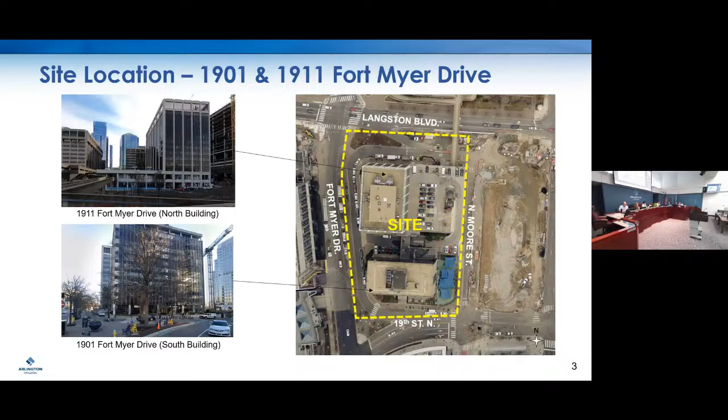This site is located at 1901 and 1911 Fort Myer Drive in Rosslyn. There are 2 existing office buildings on the site today, the north building and the south building, that were built in the 1960s and would be demolished with this redevelopment program.

In terms of the general land use plan, this site is designated as high office apartment hotel on the GLUP map, and it's within the Rosslyn Coordinated Redevelopment District.

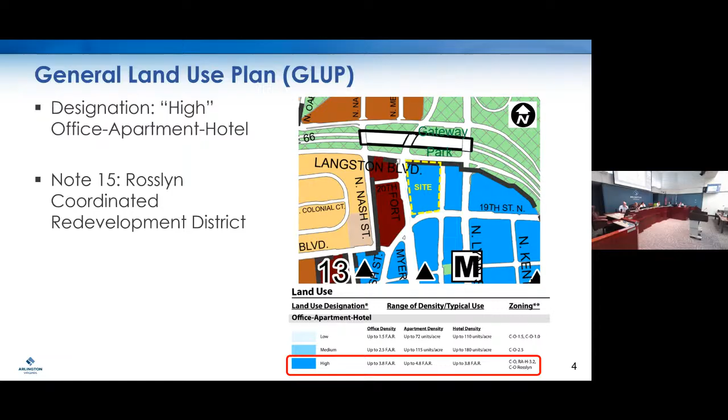There is a rezoning associated with this site. Currently, the existing zoning is S-3A and C-O Rosslyn Mixed Use District. There's a very small, about 2,400 square foot portion of S3A at the very northern portion of the site that would be rezoned to C-O Rosslyn so that the entire site would be consistently C-O Rosslyn.

C-O Rosslyn does allow the county board to approve densities up to 10 FAR, and this proposed rezoning is consistent with the site's GLUP designation.

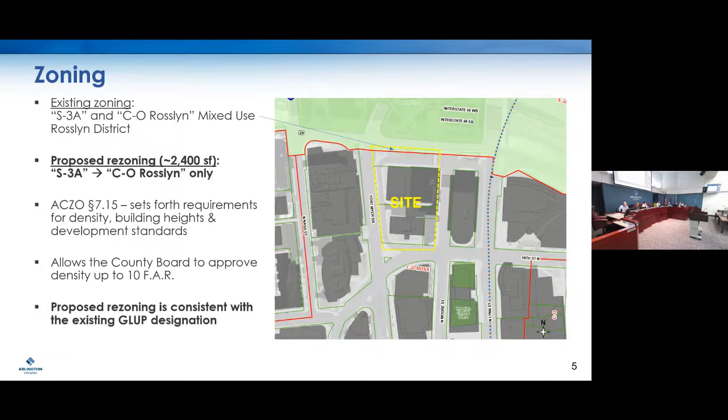The applicant will go into much greater detail in their presentation, but just to summarize the redevelopment proposal: the first action would be to discontinue the previous PDSP as it's no longer needed because the site would develop in a single phase, and then have a new site plan amendment to construct 3 residential towers above a mixed-use podium at a total density of 9.92 FAR.

The rendering on the bottom right-hand side of the screen shows you those 3 towers: the northeast tower in the foreground at 253 feet or 23 stories, the northwest tower at 285 feet, 27 stories, and then the south tower on 19th Street at a maximum height of 300 feet, 29 stories.

In terms of parking, the proposed residential parking ratio is 0.65 spaces per dwelling unit. We are considering working with the applicant to reduce that further to 0.5 spaces per dwelling unit. In terms of retail parking, there would be 6 spaces allocated, in addition to 21 visitor parking spaces as part of the overall residential parking ratio. There's a number of additional parking spaces that we are excluding from the count that will exist in the garage, including about 101 tandem spaces and additional compact spaces above the 15% maximum compact threshold.

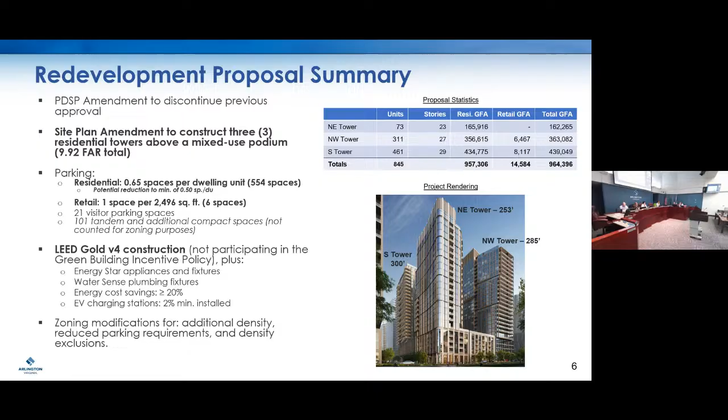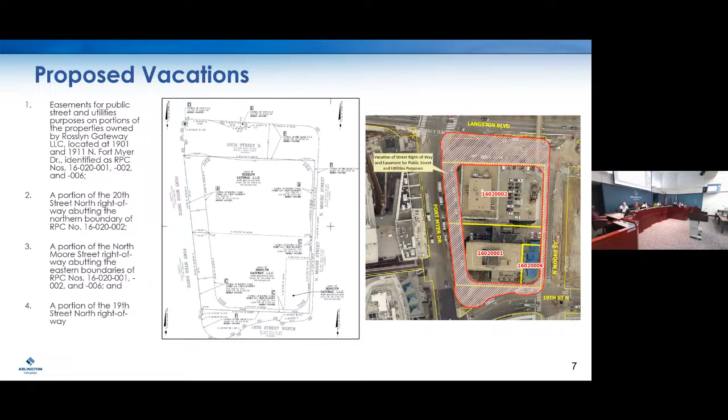As I mentioned at the top, there are also a number of proposed vacations to make this redevelopment possible. Mr. Haluski from the Real Estate Bureau is here with me this evening if there are any questions about that. There's quite a significant vacation of street right-of-way in order to expand out the street wall of this building, consistent with the sector plan.

So jumping into our analysis and discussion, the primary policy document guiding development of this site is the Rosslyn Sector Plan that was adopted in 2015. We also have the off-street parking guidelines approved in 2017, and I'd note that this document allows a residential building to have a parking ratio as low as 0.2 spaces per dwelling unit for a market rate building. This is why we're supportive of allowing a modification down to 0.5 spaces per dwelling unit. In addition, we looked at the Core of Rosslyn Transportation Study and also our Gateway Park Master Plan, an ongoing capital project, adopted by the county board back in December of '24.

Overall, this is an excellent project. This slide is not exhaustive, but an overall summary of everything this project complies with in terms of the Rosslyn Sector Plan. Our density is just slightly below the maximum allowed in terms of land use. The sector plan recommends significantly increasing the amount of housing within Rosslyn, which this will do, adding 845 new dwelling units, plus additional retail to serve the neighborhood: a retail space along Langston Boulevard and 2 smaller spaces along the 20th Street frontage. The building heights are at or below the maximums allowed by the sector plan. The sector plan recommends at least LEED Silver for sustainability, and the applicant is achieving LEED Gold with some additional commitments being made as well.

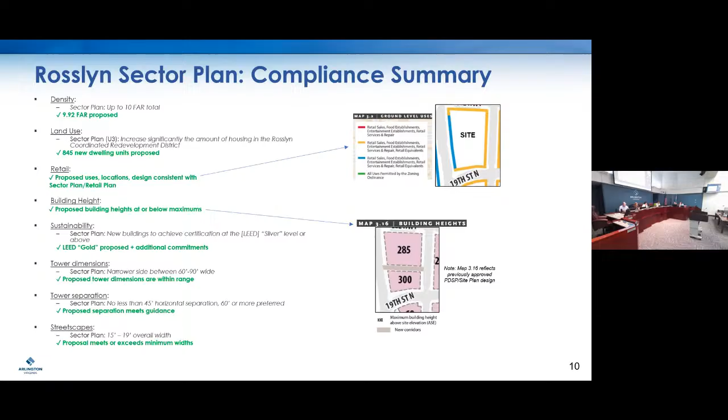In terms of our tower dimensions and separations, those recommendations are all being met here. Lastly, new streetscapes, a very important component of this project, are all meeting or exceeding the overall streetscape section width of 15 to 19 feet as recommended in the sector plan. In terms of community benefits, the applicant is proposing to make a $7.5 million cash contribution towards affordable housing in Arlington.

That fulfills our sector plan recommendation to ensure that at least 30% of the total value of the community benefits package is directed towards affordable housing. And for those who might be asking why cash over on-site, the sector plan in this instance specifically recommends a cash contribution be prioritized to the extent feasible. And so that's what we are doing here.

Additionally, $2 million towards offsite public space improvements such as Gateway Park, $3 million towards offsite transportation improvements. Again, these are both things recommended by the sector plan, and this proposal is consistent with both the zoning ordinance and the sector plan guidance for community benefits on this site.

There are a number of other significant site plan improvements that are not being done for any additional density. That includes closing of all these existing loop and service roads that circumnavigate the site today to make it much more pedestrian friendly and claim back some of the vehicular travel lanes for pedestrian and cycling use, as well as the skywalk removal, which is consistent with the master transportation plan and the Rosslyn sector plan.

And I just note if there are questions about that, we have a lot of additional information that we can share that we shared with the county board last month.

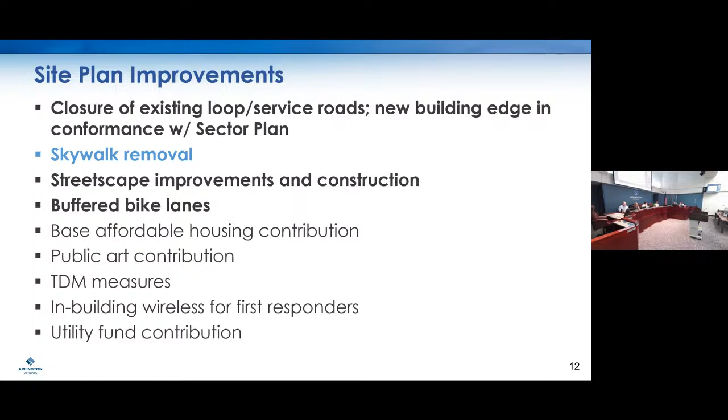We had a robust community engagement process that kicked off back in February with an online engagement, followed by 2 SPRC meetings, one in March and one in May. And so we're here tonight before you at the Planning Commission.

Last Monday, this project went to Transportation Commission, where all motions passed unanimously, and the main motion passed 11-0. This project will also go to the Housing Commission tomorrow evening before going to the County Board on the 19th.

Overall, again, this is a really good project that fulfills the last of a 3-block segment down in Rosslyn per the sector plan's guidance, and makes a number of really critical contributions and advances several key county goals.

So not going to read verbatim off the slide, but again, in terms of affordable housing, it's combined $11.2 million between the base and the bonus. New housing in terms of 845 new dwelling units, new retail to serve the neighborhood.

That's actually closer to 15,000 square feet. All these pedestrian realm and streetscape improvements that the applicant will be showing in their presentation. Again, LEED Gold certification and 20% energy optimization, and world-class architecture and building design that's called for in the sector plans.

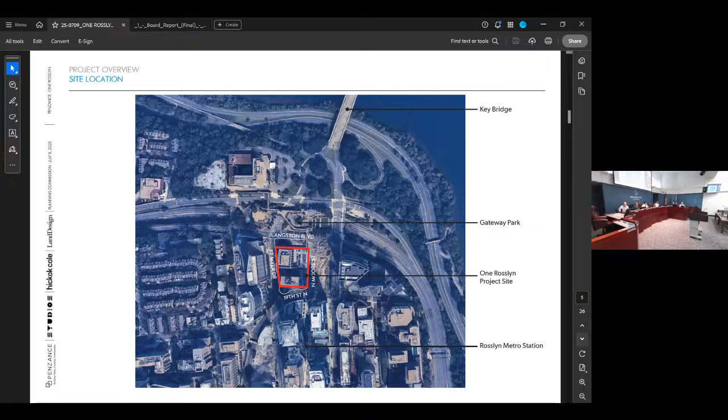On the next slide, you can see a little information about the background and our team. As mentioned, we've assembled a world-class team with experience throughout Arlington and beyond. On the next slide is some information about the project location, but I think Mr. Watson covered that adequately, so I will move past that.

Moving to the next slide here, you can see that the existing site is currently improved with 2 aging, obsolete office buildings, and the existing site is around 72,000 square feet, but it's surrounded by county-owned loop roads, service drives that are a vestige of the 1960s auto-oriented development that was in place when the buildings were built.

So in order to comply with the recommendations of the Rosslyn Sector Plan and to create the type of urban environment that Rosslyn really needs, the street wall in any new condition is going to need to be pushed out to meet the public right-of-way. And that's going to necessitate a large vacation of county interest in these areas at cost, and it will increase the size of the site area dramatically.

Removal of these service drives and loop roads will be an important component of enhancing the urban design here, ensuring safety for pedestrians and vehicles alike by creating a regularized street and sidewalk network and really creating the kind of place that's called for in the sector plan.

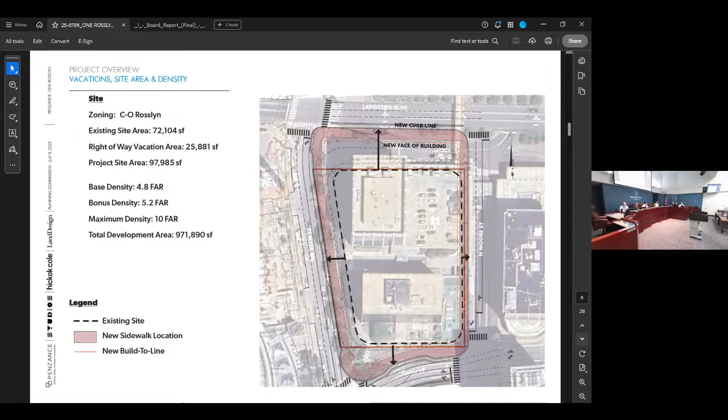On the next slide, if this site looks familiar, that's because it was approved back in 2012 by a previous owner for an office-heavy scheme. For reasons you can imagine, that was not really financeable or buildable going forward, so the existing property has stayed as is since that time.

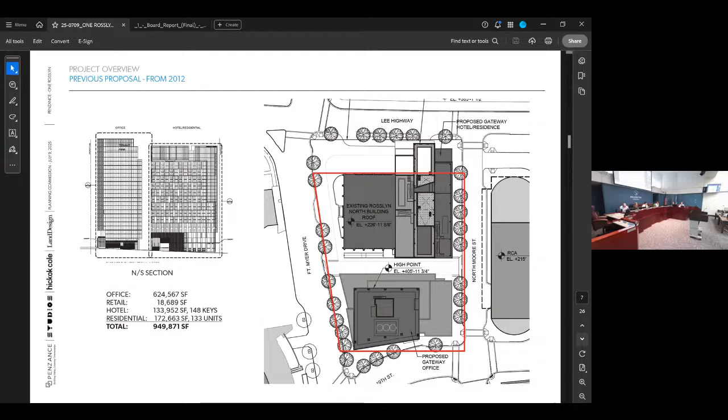On the next slide, we are going to be replacing that entitlement from 2012 with a new residential scheme. We are proposing to build 3 towers on a shared podium with 845 residential units and about 14,000 square feet of ground level retail. Those towers are located on the northwest, northeast, and south sides of the property.

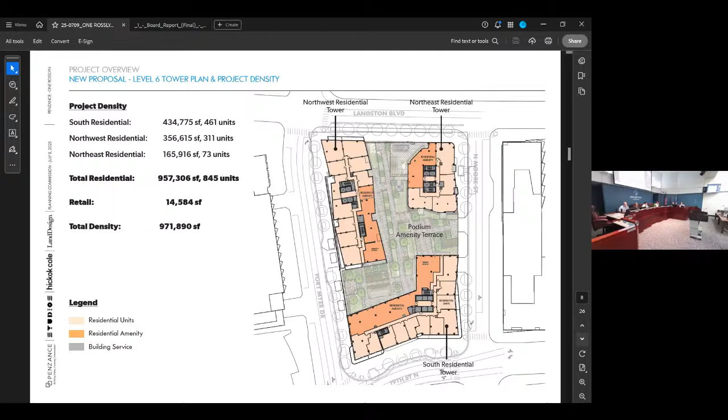The next slide shows you the ground level. You'll see that we've got pedestrian entrances and lobbies in corresponding locations on Fort Myer, North Moore, and 19th Street. We have tried to limit the number of curb cuts at the site; we're serving these 3 buildings with only 3 curb cuts.

Parking entries on the west side off of Fort Myer with a consolidated entrance ganged up with some of the entrances on the nearby Holiday Inn site, and the loading is on the east side on Moore Street. There are 2 entrances necessary because of the grade change in that area, but we have again tried to gang the loading up with that of the RCA building farther to the east. This loading will be head in, head out.

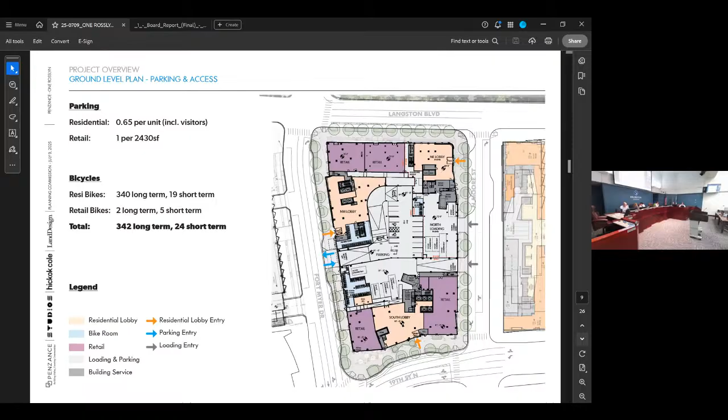So with that, I will turn it over to Alan Beal at Studios to talk a little bit more about the design. Thank you, good evening. My name is Alan Beal with Studios Architecture, leading the site design for the applicant.

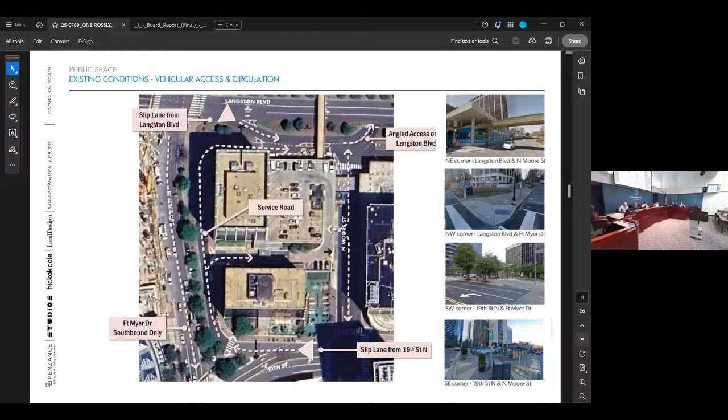This slide shows the existing aerial photograph and street photos, highlighting the current auto-oriented 60s era planning with service roads that loop around the site, resulting in discontinuous sidewalks and areas where pedestrians have to navigate vehicular traffic, along with buildings deeply set back from the roads with little space for engagement and extremely limited vegetation and street trees. While this site is located a block from Metro, it does not reflect current planning principles for transit-oriented design.

Our proposed design shown here will make a much safer and engaging experience for pedestrians by adding street front retail, shown in purple, with generous continuous sidewalks and crosswalk improvements highlighted in blue. On-street parking will also be provided on Fort Myer, along with pickup drop-off on 19th, Fort Myer, and North Moore, adjacent to each building lobby, shown in yellow.

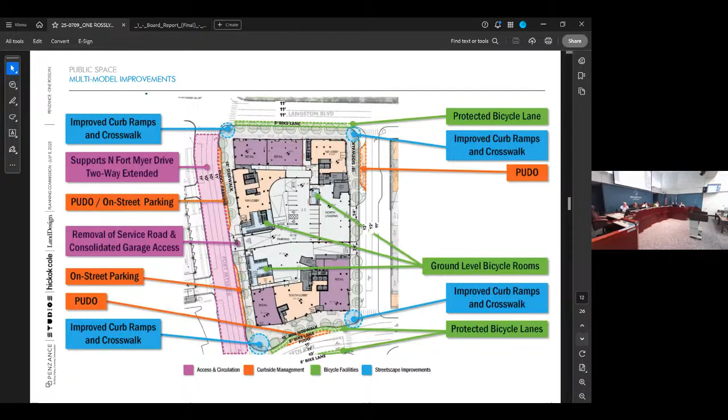Finally, as highlighted in green, new ground level bike rooms and protected bike lanes on Langston and 19th Street, along with the planned Fort Myer cycle track, will further advance the multimodal objectives of the sector plan.

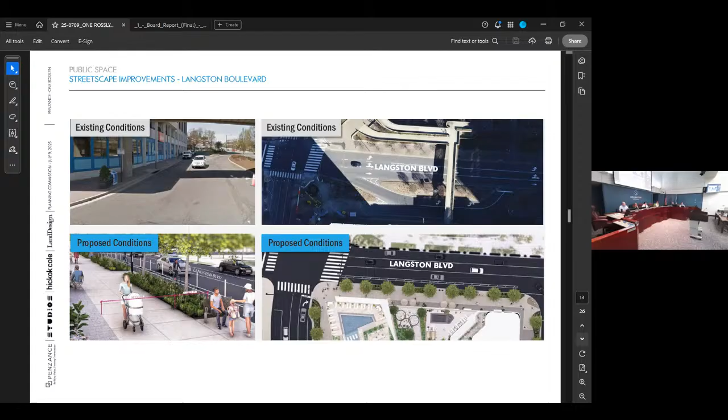On Fort Myer, the top image shows the existing conditions with a service road and 2 lanes of parking, while the bottom image shows the proposed condition with a much wider continuous sidewalk, street trees, and a landscape strip while providing opportunities for on-street parking and pickup drop-off.

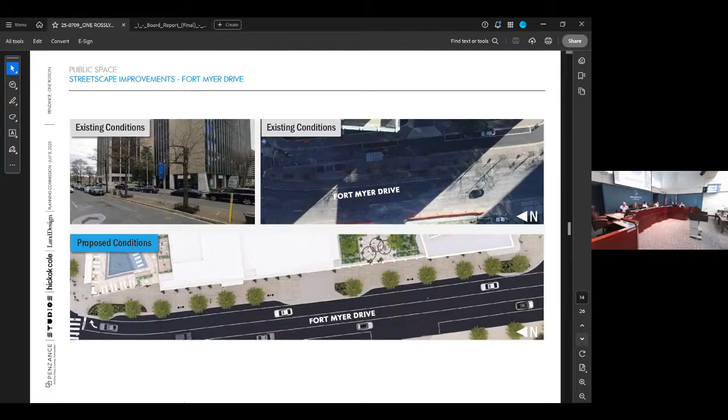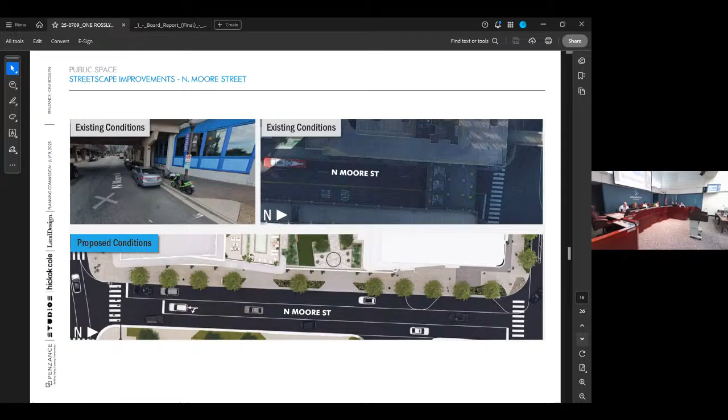So finally, on N. Moore, the existing images on top show sidewalks with no vegetation compared to the proposed, and narrow sidewalks compared to the proposed on the bottom showing wider sidewalk and street trees.

So the architectural concept looks to nature for its inspiration, particularly the role hydrology plays in creating natural forms. Towers are carved and sculpted to create a variety of heights and expressions consistent with the sector plan goals. Studios and HCA felt this biophilic approach was particularly important given the project's adjacency to Gateway Park.

In addition to the overall context of Rosslyn, we carefully considered the adjacent development under construction, especially as it relates to our podium design. The design breaks down the current superblock by carving away at the key corners to allow each tower's architecture to come to the ground, highlighting arrival points and adding variety to the streetscape per the sector plan principles.

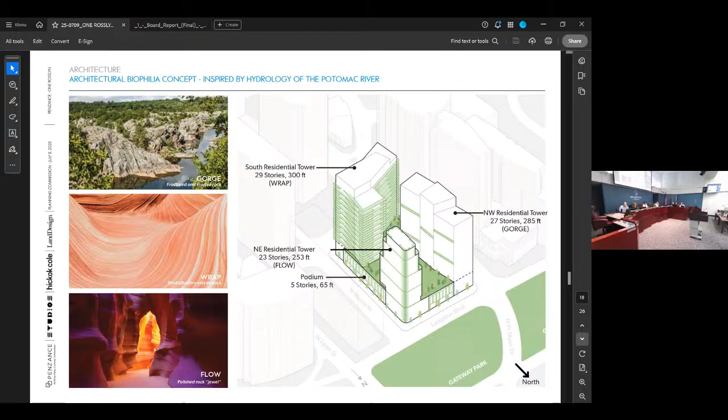This view from Georgetown illustrates the prominence of the site as an iconic gateway arrival from the Key Bridge, and how these towers will complete this edge of the Rosslyn skyline.

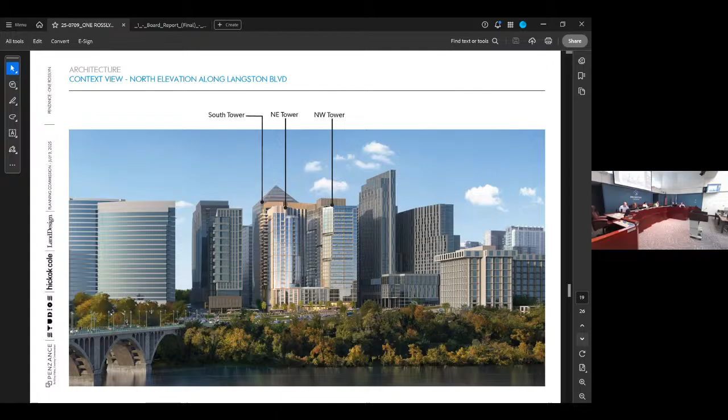Penzance very intentionally brought on a second architect for the Northwest Tower to ensure variety in the design. It's been an excellent collaboration working with Hickok Cole Architects in developing a design where each tower has its own distinct geometry, but is also complementary to one another.

Next slide. As we walk around the site, this view is taken from the northeast corner of Langston and N. Moore, highlighting the strong verticality of the Northeast Tower on the left and the stepping of the Northwest Tower on the right. As they face Gateway Park, retail and residential units front the park, creating a vibrant pedestrian-scaled experience.

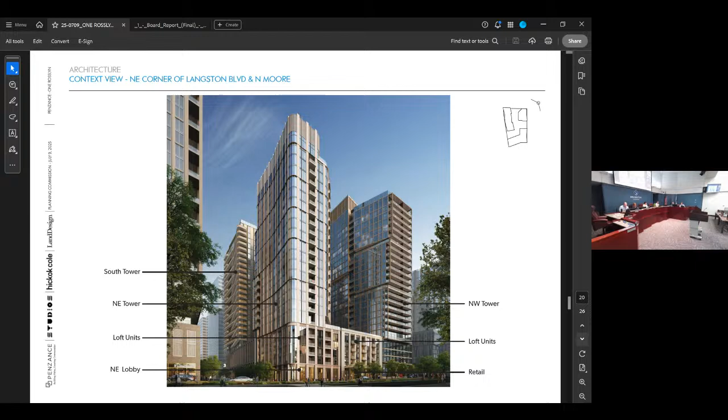Rotating around the site to the corner of N. Moore and 19th Street, this view depicts the South Tower as you arrive from the Rosslyn Metro Station. Ground level retail flanks both corners on the left and the right, further activating the streetscape.

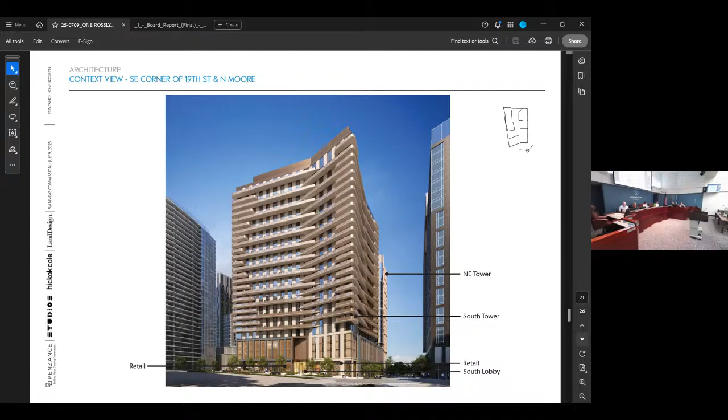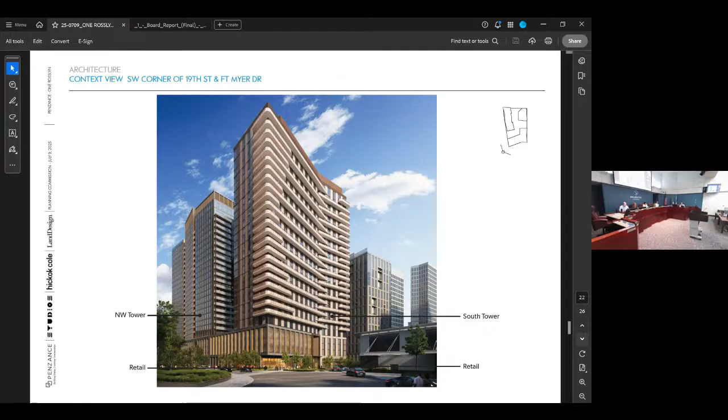As we go to the last view, pivoting back to the northwest corner of Fort Myer and Langston Boulevard, I'll turn it over to Guy with HCA to talk in more detail about the Northwest Tower.

Thank you. Good evening, my name is Guy Almeida. I'm an associate principal and design director at Hickok Cole. I've been leading the design of the Northwest Tower, which is intended to complement but remain distinct from the Northeast and South Towers. The Northwest Tower draws inspiration from the dynamic, eroded landscape of the Potomac Valley Gorge, located just northwest of our site.

It is composed of three distinct volumes stitched together and defined by rows of balconies and outdoor spaces. These elements create generous opportunities for residents to engage with the park and enjoy views across the river. The volume facing the park features a strong vertical expression that runs down to grade, establishing a clear hierarchy in the retail frontage and bringing variety to the street wall created by the podium.

The massing of the tower gradually steps back from the Northeast Tower. This erosion of form opens the courtyard space between the two northern towers and results in a tapered silhouette on the Rosslyn skyline. The tower's sleek aesthetic provides a subtle contrast to the masonry base.

At street level, framed openings with distinct materiality enhance the streetscape and promote a more engaging and pedestrian-friendly environment. Active uses such as a generous residential lobby fronting Fort Myer Drive and retail along Langston Boulevard contribute to a lively and inviting public realm that engages Gateway Park at the northern edge of our site.

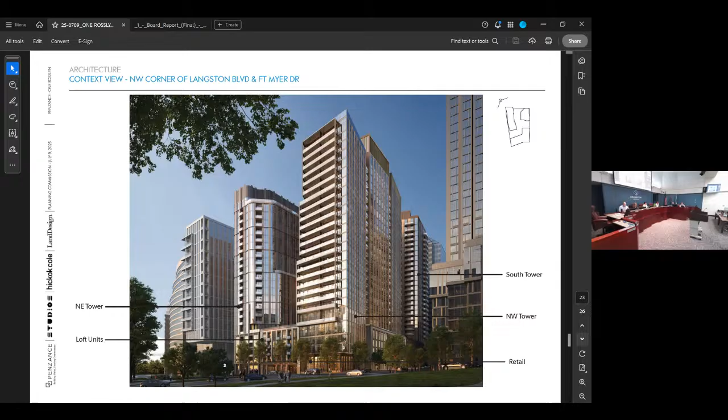Next slide. And with that, I'll turn it back over to Ked. Great, thank you, Guy. I think Mr. Watson did a great job of walking through the community benefits associated with this property.

So I'll again try not to be redundant. As he mentioned, we are not participating in the Green Building Incentive Policy Program. We are not receiving bonus density as a result of green building. However, we are still undertaking a number of sustainability elements that we're very proud of at this project.

As both parties mentioned, there are significant site improvements here that will really achieve a lot of the goals of the Rosslyn Sector Plan. We are participating in the Transportation Management Plan and Public Art, as you would expect in any site plan project. We are making a significant contribution to both Gateway Park and off-site transportation improvements to the tune of about $5 million. And our affordable housing contribution, inclusive of both the base and the bonus, is just over $11 million.

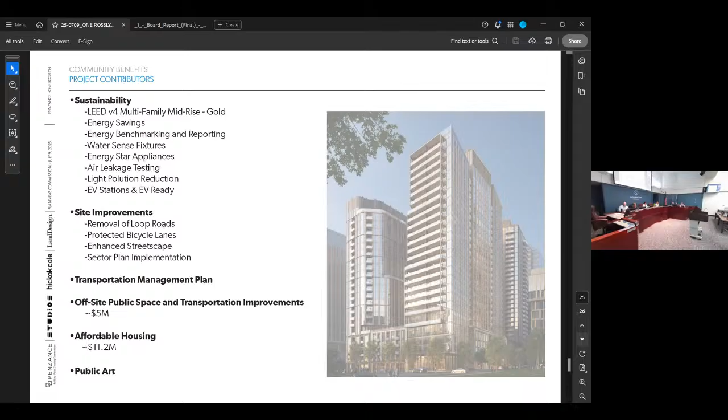So with that, I will close the presentation and we will be available for any questions you may have. Thank you.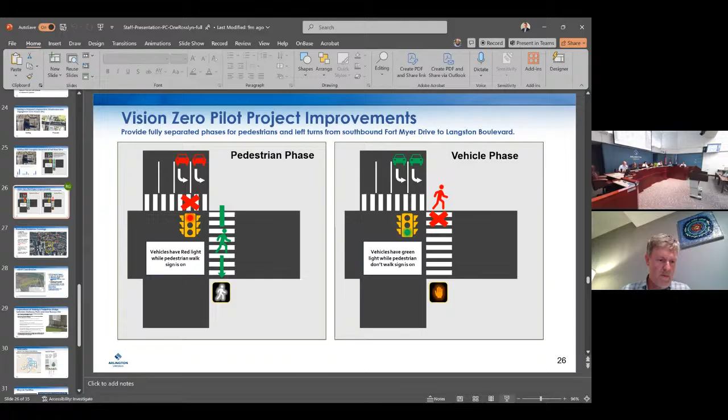I see one of my colleagues pulling up an image on the screen - Mr. Watson is pulling up an image showing what we mean by protected left turns. If you look at the image on the left side, the two vehicle left lanes have a red arrow, meaning they cannot move, while pedestrians have a walk signal. Conversely, pedestrians have a raised red hand when vehicles have the left turn green. So when I say they're separated, they are both signal controlled and do not go concurrently. The problem we had in the past is that they were going concurrently at the same time, which caused that conflict. Does that answer your question?

Yes. The real thing I was trying to get a sense of was staff's thinking as to the design in light of that possible finding - if that finding is going to be a continued trend. You've shared that with me, and that gives me a lot of confidence overall in how staff is approaching the problems at this intersection. Thank you. Okay, thank you.

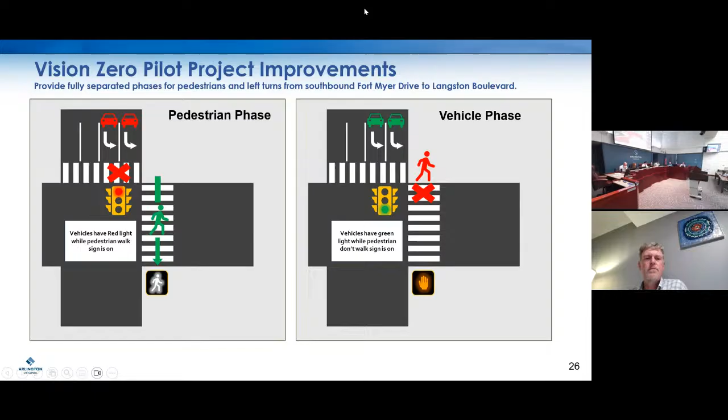Oh yes, Commissioner Steinberger. And then we're going to move on to sustainability and biophilia.

So is there a distinction that was intentionally being made in the last response with regards to severity of pedestrian-car impacts on a left-hand turn versus the frequency of a left-hand turn versus a right-hand turn? I just picked up on how you answered the question - I was trying to figure out if that's a meaningful distinction.

It is something that we look at. Our Vision Zero program is focused on eliminating critical crashes, what we refer to as a severe injury or fatality. Those are our primary focus. We don't want a critical crash to happen, period. We want to solve those as quickly as possible. Obviously, locations with multiple crashes show a trend, and we're addressing those multiple crash trends in a different manner as well. Does that answer your question?

Not exactly. I was trying to ask if left-hand turns are more severe generally than right-hand turns, but right-hand impacts are more frequent. I would have to look to see what the current trends are, but we have seen that trend in the past, and it's very site specific. I will have to get back to you in terms of what the current trends are regarding right turn versus left turn crashes.

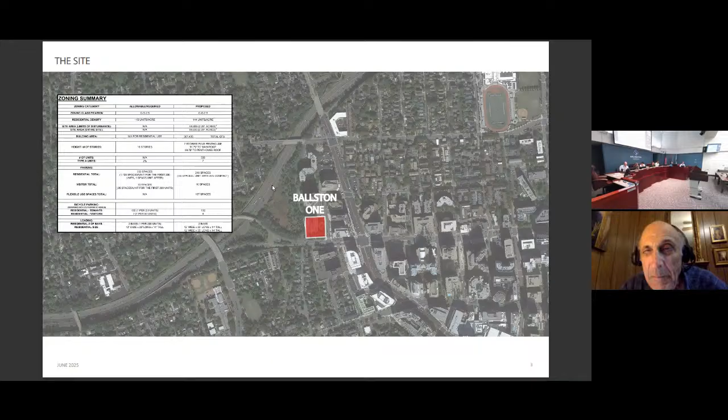Just to give you some quick context, I'm sure you've walked past this building any number of times, but it's one of those buildings built in the 1980s that doesn't have a great urban context today. As you can see, specifically along Fairfax Drive, the building doesn't sit near the urban edge. The shared use path really is not living up to its full potential, and those are some things we want to correct.

Similar set of conditions on North Wakefield Street. In particular, I'd point you to the large curb cut into the office building, which will go away with this redesign of the site, as well as on the back end of the site, we have access to the wetland park trail, but simply no relationship between the building and that trail.

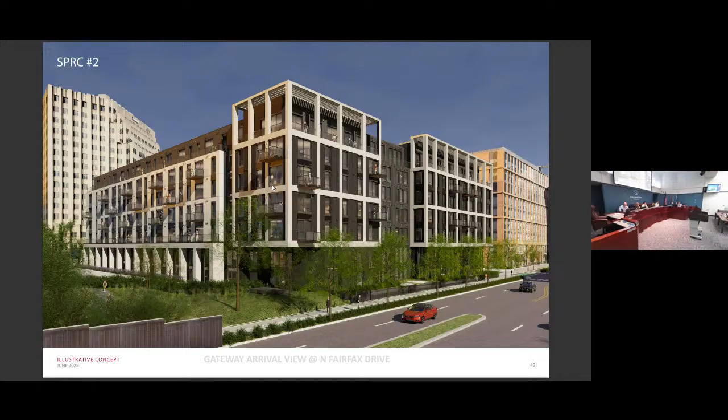I'll move through this fairly quickly. As Matt mentioned, we've done a lot of work on the architecture. This was the second option proposed at SPRC2, dealing with overhangs and some of the horizontality of the building, as well as the materials palette. What's ultimately being proposed, shown next, extends the gateway features of the building both at the peak as well as at the ground level, in terms of the gateway experience with the landscaping plan and the shared use path. We've also significantly reduced the materials changes across the entirety of the building.

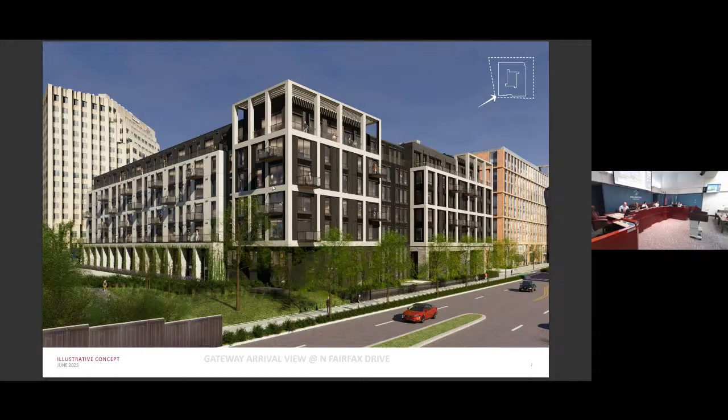Again, at North Fairfax Drive, you can see the changes, where now you have this additional pergola structure extending the gateway, as well as at the base with the stone materials, eliminating that extension over the sidewalk. So we now feel we have a great set of architecture along this gateway frontage.

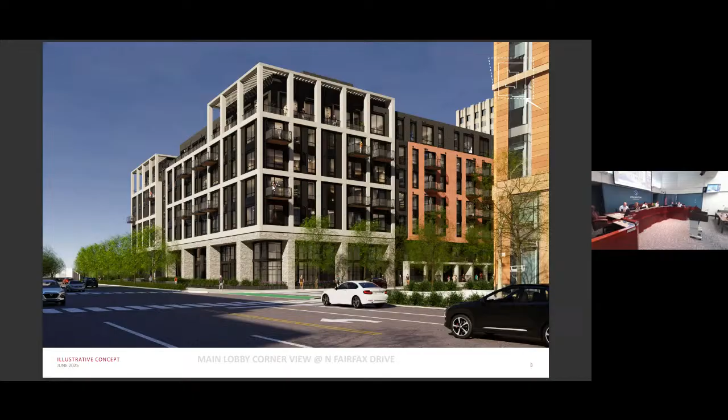So just to highlight at the base, we had a lot of questions about where the entry for the building was going to be located. This is actually located further up on Wakefield Street, eliminating potential conflicts for people trying to get into the building with all the traffic happening at the intersection. I would also note we have on-street parking in this area for short-term parking and drop-off opportunities.

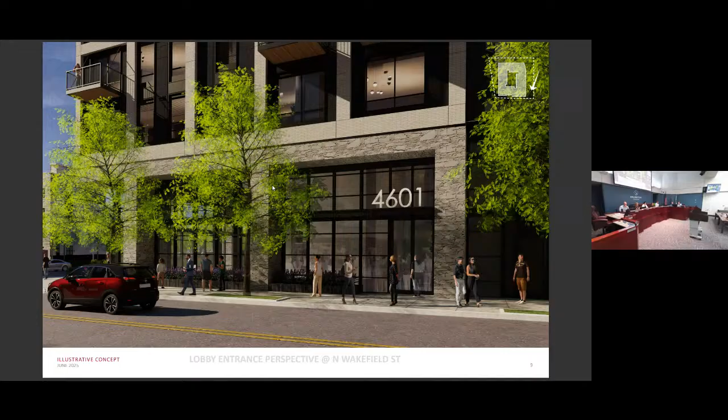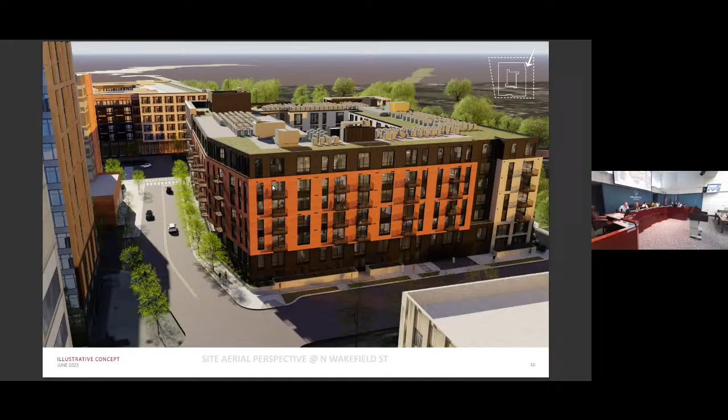Just at the base, one thing to highlight, these will be ground floor patio units, which really adds more eyes on the street, drive activity for this building where none really exists today when people go home from the office building. It's complementing what's happening above with the balconies.

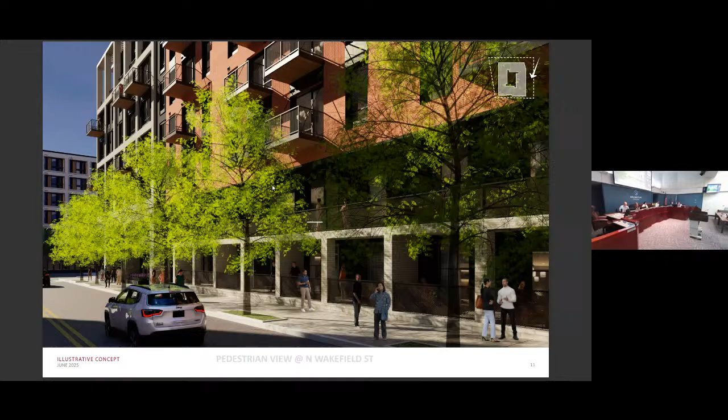One thing we're really proud of is what we've done on the western edge of the building next to the wetland park trail. In addition to the landscaping, we've added an additional biophilic element with the native vine structure featured directly on the building, which is going to extend over the garage as well. We think that's a wonderful addition to the building.

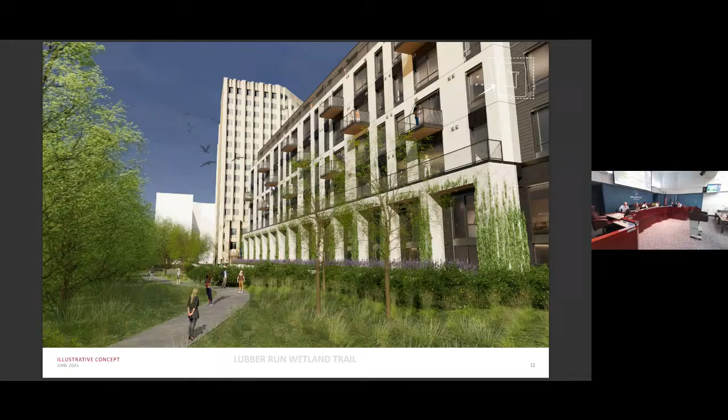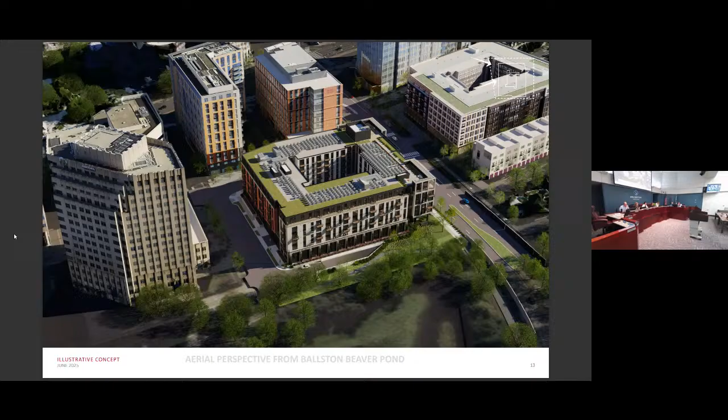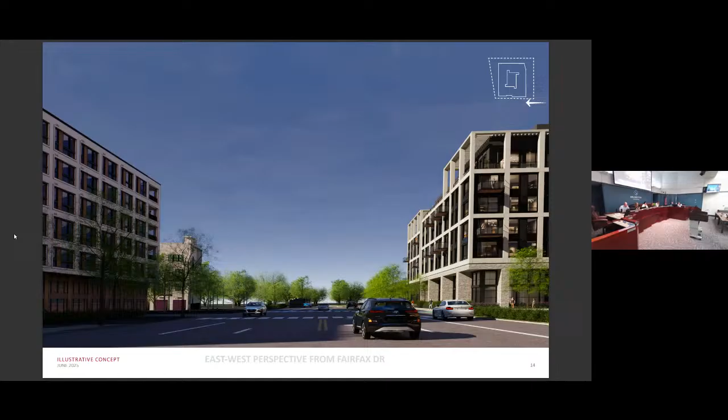As we zoom out a little bit, you can start to see the context of this building within Ballston. The next two slides are going to show you where we're going in terms of the relationship with the Holiday Inn project on the south side of the street. You can see how the gateway gets created here on both the western edge as well as the eastern edge.

And then looking eastbound, you can see how the taper and building heights called for in the Ballston sector plan starts to come together.

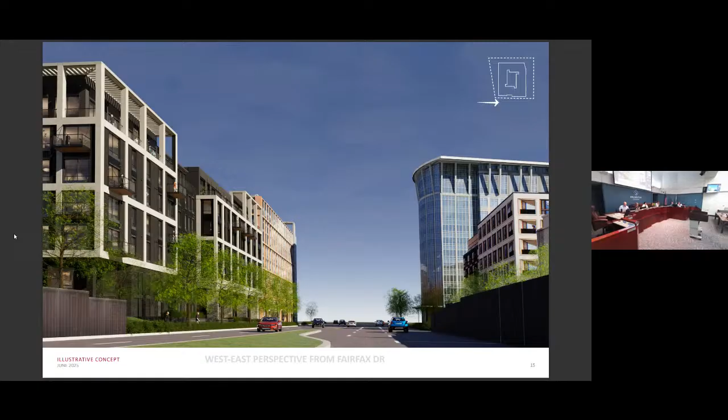Just to talk a little bit about the site design and layout, we have quite a lot of good features to work with here along all of our frontages. Overall, we will be providing an enormous number of trees to maximize that both within the interior of the property as well as around the edges. We have a great opportunity along the Wetland Park Trail as well.

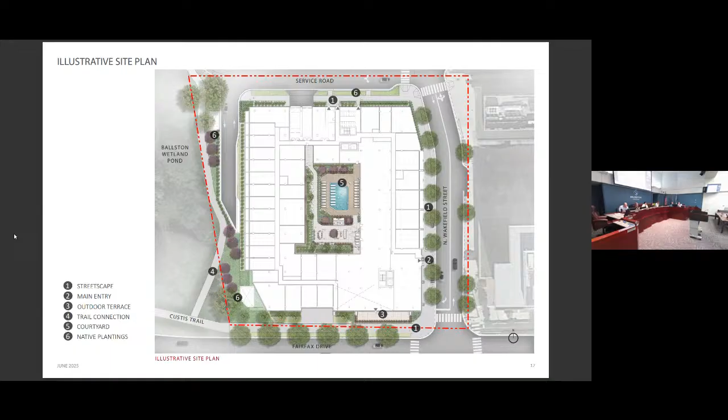Just in terms of Fairfax Drive, to highlight a couple of the features here, this is going to be a 17-foot minimum right-of-way. The constraint of the garage there and the retaining wall that needs to remain kind of limits the overall width, but we will be providing a 12-foot wide shared use path for both bicyclists and pedestrians.

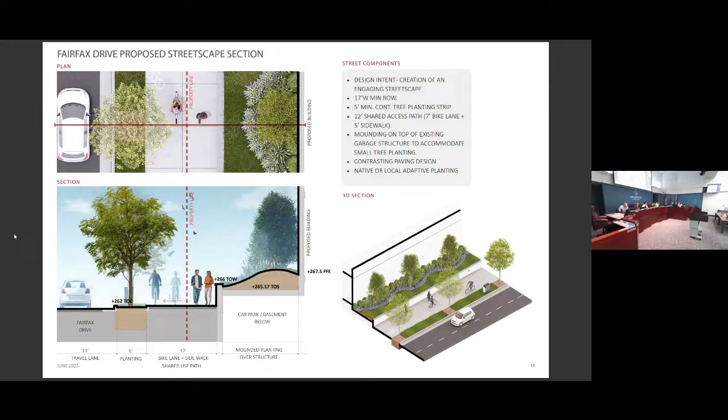Similarly, on Wakefield, we'll be redoing that sidewalk, removing the curb cut, ultimately with a 9-foot clear sidewalk, as well as the new tree panels.

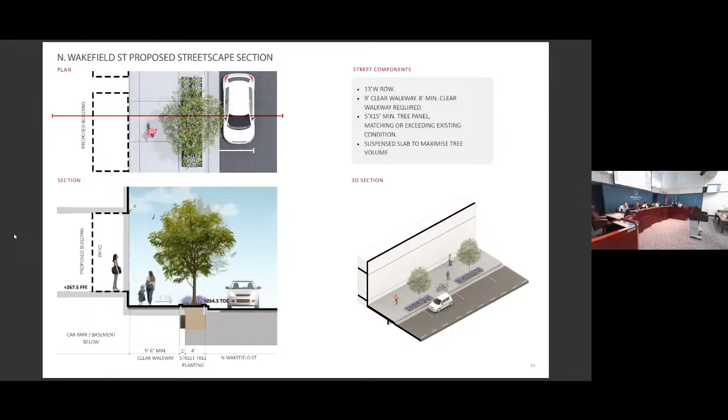We're really excited about what's going on with the service road. In particular, in this area, we'll be adding bioretention planters up against the building, as well as a planting strip up against the roadway, and ultimately a 6-foot sidewalk for pedestrians.

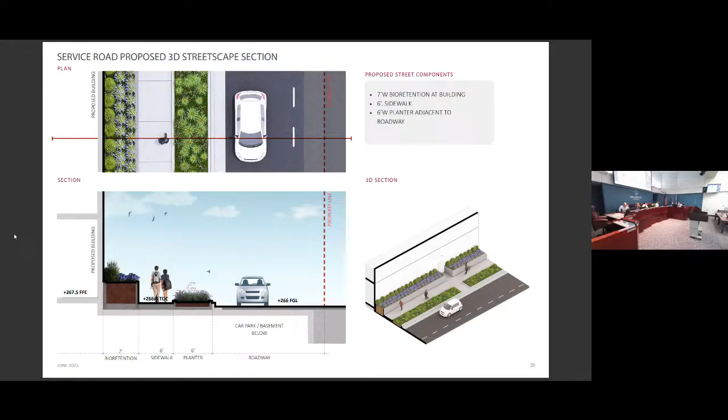One feature to highlight here is that we've also bumped out the sidewalk in this area to reduce the north-south pedestrian access. So that's now 6 feet less than it is today, and that'll ultimately be a much safer crossing for pedestrians in the future.

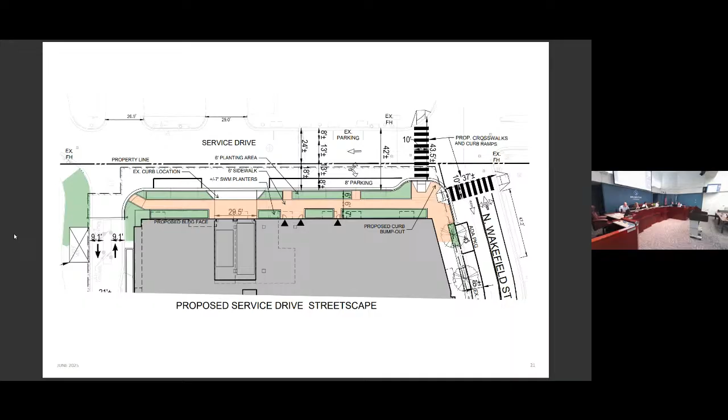Just to highlight, because SPRC talked quite a bit about the landscaping and tree canopy, we can certainly come back to a lot of this. Overall, the planting for this site is going to feature pollinator-friendly and native vegetation.

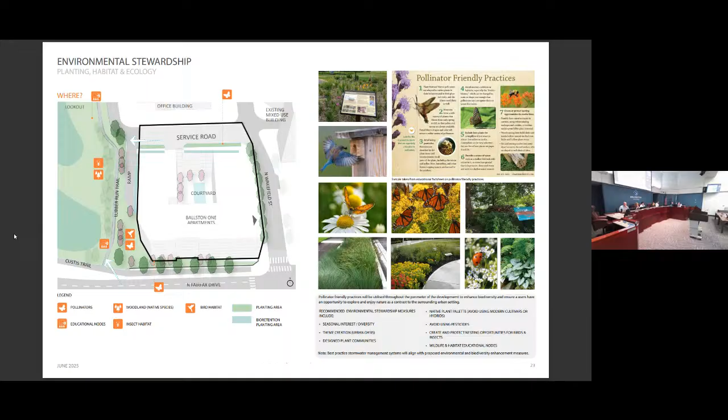On the next slide, you can see just a very quick sampling of what we would propose for the building.

So just again, around the site, you can see on Fairfax Drive how we're helping to create the gateway experience for pedestrians through the landscaping panel, specifically up against the building, and how that continues along the Wakefield Street edge. We're really happy with the service drive, as well as all the native vegetation that we'll be adding along the Wetland Park Trail.

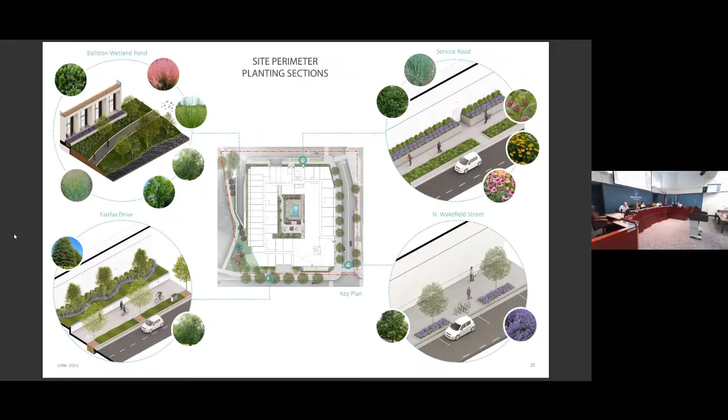In terms of the county policy standards, we are maximizing what we can do around the site, achieving almost 16% tree canopy. In terms of what those COG standards say, it's important to note that while 25% is a goal, ultimately each site does need to be taken on its own merits, and that's specifically in the COG guidance.

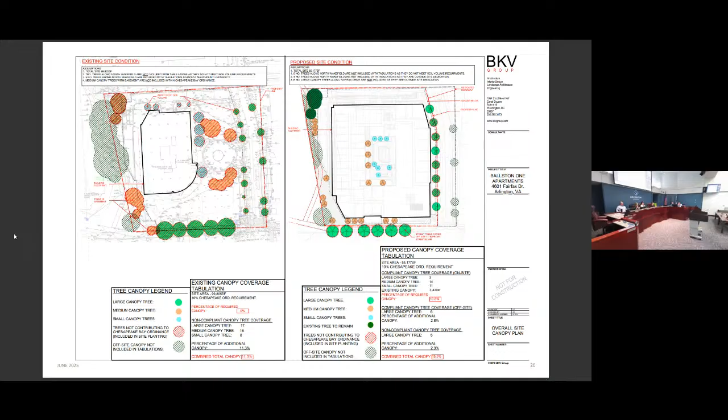Just to talk very briefly about transportation, the site is well accessed for pedestrians. From a vehicle generation standpoint, we are going to have fewer AM and PM peak hour trips and will ultimately participate in a TMP plan.

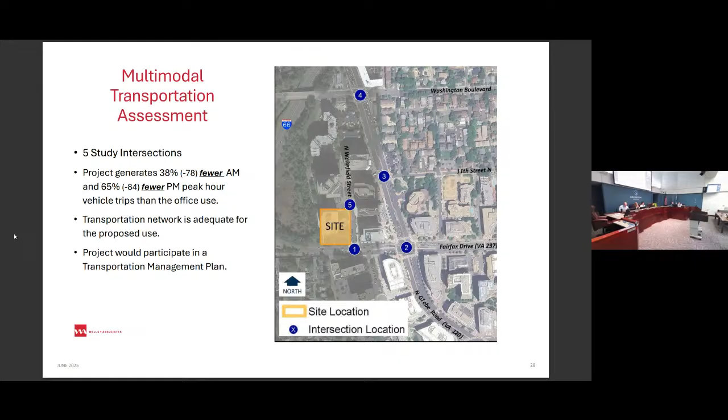In terms of pedestrian access, well accessed from all sorts of adjacent sidewalk networks. Ultimately, the score for this site would get us to what is considered a walker's paradise, so very little need for a car here.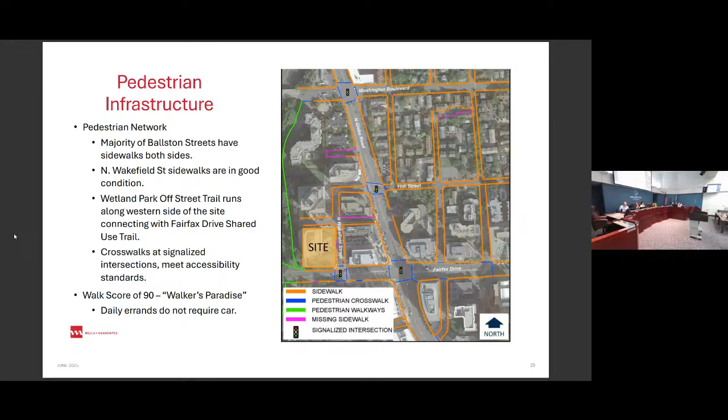Similarly, with bicycle facilities, as the commission knows, we have all sorts of access to trail networks in and around the site, as well as that shared use path, which will be continuing.

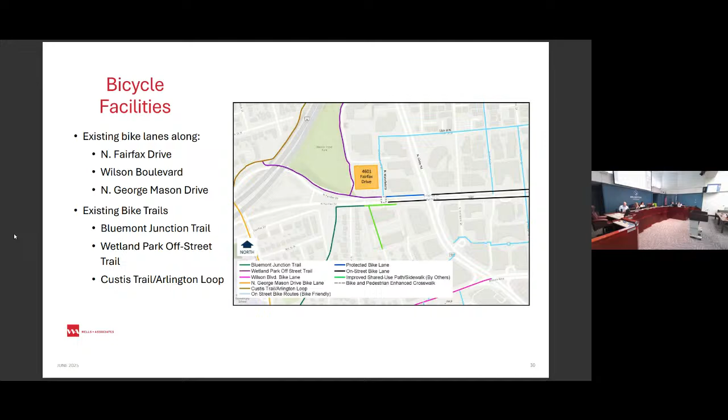Buses as well, lots of great bus access here, a number of bus stops in the area, great access to Metro, and certainly when the second entrance comes online, we'll have that opportunity as well.

Just to highlight bicycle parking real quick, there will be sufficient bicycle parking both at grade and in the garage, so for visitors as well as residents and guests, as well as short-term parking along the street.

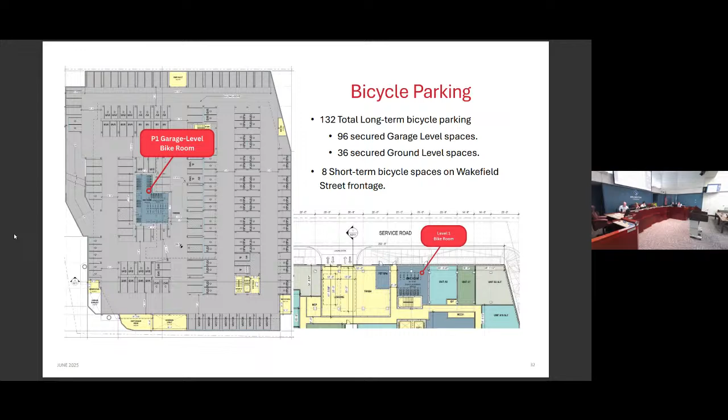In terms of site circulation, we will ultimately be providing site circulation in very similar fashion to what we have out there today. We are going to have 228 total parking spaces, but retaining 107 flexible use spaces, given the fact that we have this existing garage to play around with. I'd highlight in terms of EV charging, we are going to be exceeding on day one with 6%, as well as 23% EV ready, which also exceeds the requirements.

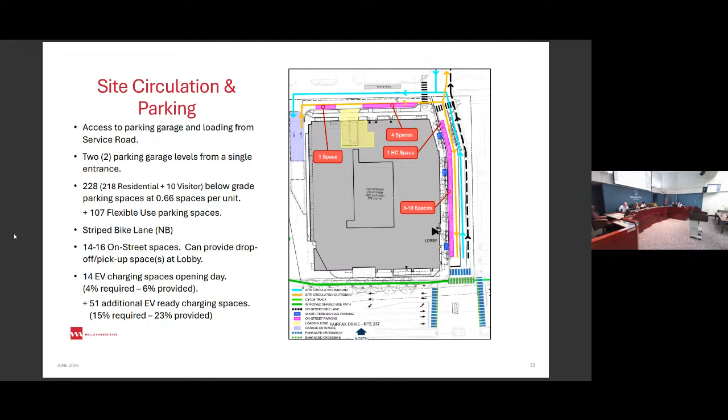Just in terms of pedestrian crossings, we are going to have an alignment with the south side with what Ballston Holiday Inn is proposing, so we've aligned our curb cuts to that.

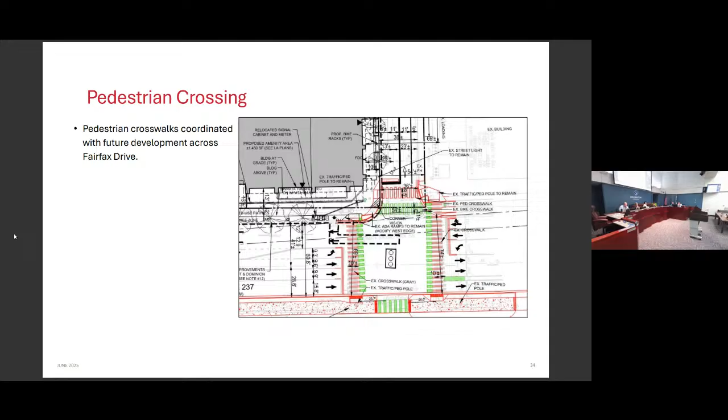I do just want to highlight very quickly, if the commission will allow, this building is achieving the Green Building Incentive Policy at the 0.25 level, bird-friendly glass, dark sky friendly, and EV charging as I mentioned.

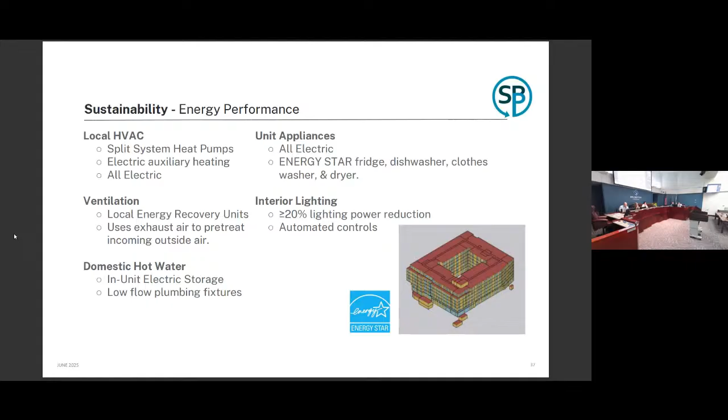Last but not least on this point, this will be an all-electric building. And if the commission will allow, I would like to just highlight for one quick second, we have had some delays in getting these slides to move, so I apologize for the delay there.

Matt's talked about the community benefits for the site, so we won't belabor that point. I do want to highlight stormwater management for this building. It's been a big topic of discussion with the community. Candidly, the short answer is there's really none out there today. This is a building built long before modern stormwater management standards. This building is going to contribute significantly with new stormwater management and BMP facilities. Approximately 24% of that roof is going to be green roof with additional planters around the site as well as engineered soils. Ultimately we have the numbers we can walk through for you, but at the end of the day, this will be a vast improvement for stormwater management.

There's much more that we could highlight and certainly happy to walk through that as the commission asks, but thank you very much for your time and looking forward to your questions.

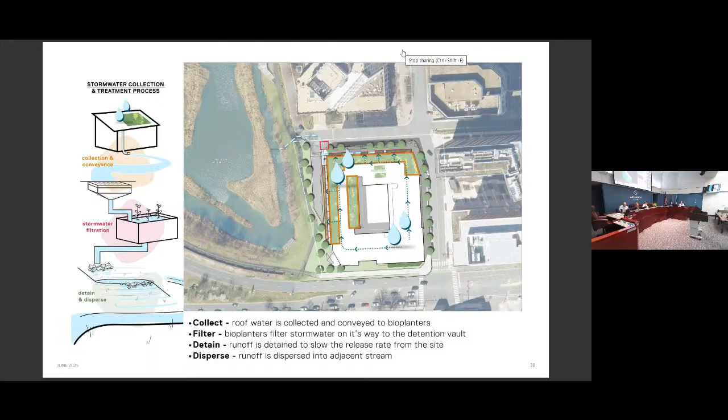This project is neither biophilic nor sustainable. Make most of the roof green, not just 25% as proposed, or place solar panels on the roof. The light shining through the windows facing the Ballston Wetland Park at night will attract many moths and other insects. These will disrupt their life cycles and prevent their reproduction. The applicant must develop a site plan condition that requires all occupants of building units facing the park to sign leases requiring them to shade their windows at night. This is important, you're near a park. The project's conceptual landscape plan does not identify any shrubs or perennials. This is not acceptable, and they've changed the rules to prevent that in the future.

In contrast, more than 80% of monarchs migrating to Mexico are fed on common milkweed, Asclepias syriaca, as caterpillars. Common milkweed thrives in both dry places and ditches. Therefore, add common milkweed to the plant list. This is very important—install much of it in the bioretention area and elsewhere on the site.